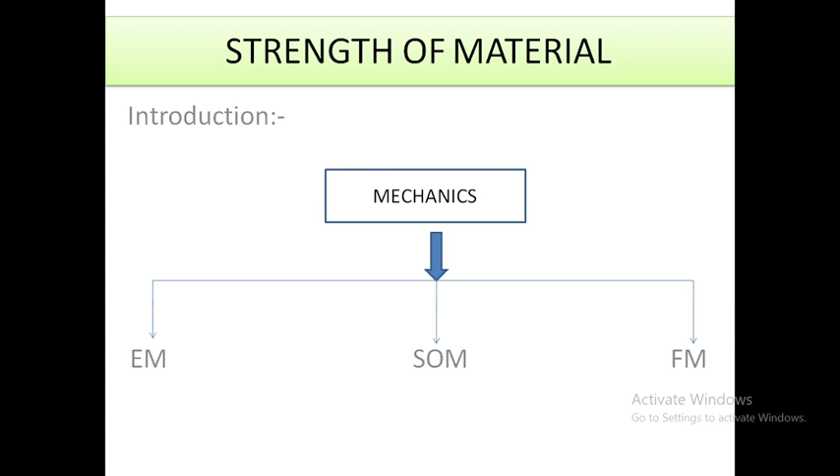Strength of material is a branch of mechanics. Mechanics is divided into three categories: engineering mechanics, strength of materials, and fluid mechanics. In engineering mechanics, we deal with a rigid body, which is totally a hypothetical study, meaning it does not exist in real life. This is because a rigid body is such a body in which deformation does not take place under the action of any external loads, meaning there is regardless deformation, so such type of material or body does not exist in real life.

Strength of material is a branch of mechanics in which we study about the deformable body, meaning in strength of materials we especially deal with the deformable body. Deformable body is nothing but a body which deforms, meaning a body which changes in its dimensions, either diameter or length, under the action of external load, under the action of mechanical force. Mechanical force is nothing but the load.

Similarly, fluid mechanics is also a vast or immense subject in civil engineering. In fluid mechanics, we deal with deformation continuously. Once the external load is removed, it also deforms continuously. So this is the introduction of strength of materials.

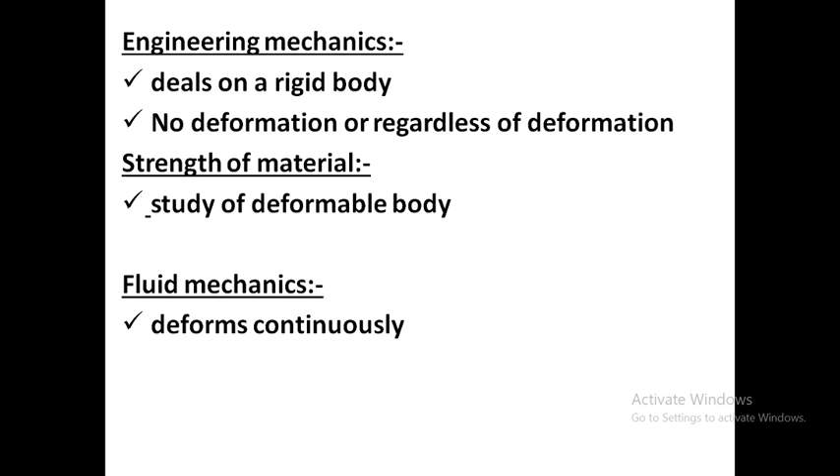So what will we study especially in this series of lectures? Dear students, I will make sure that you understand the concepts of strength of material well at the end of the lectures. I will connect what we are studying in the theoretical part to the practical level. Once you know the practical meaning of anything, especially in civil engineering, it will provide a well and lucid knowledge in a particular subject.

In unit 1 we are going to deal with simple stress and strain. Stress, I will tell you in short: stress is nothing but the internal resisting force. It is internal, not external force, it is an internal resisting force. When any body on earth is subjected to external load, there must be an internal resisting force. When you cut the body, there is an internal resisting force which resists the external load. That is nothing but stress.

Strain, if you simply say, is the measurement of deformation, what deformation takes place under the action of external loads, the body must deform. That deformation is nothing but the strain.

Similarly, second we will deal about the types of stress and strains. Elastic constants: in elastic constants we will deal about the modulus of rigidity, bulk modulus, Poisson's ratio, which is very important in the civil engineering field. Similarly, Hooke's law: Hooke's law is nothing but when stress is directly proportional to strain within the elastic limit. Similarly, stress strain diagram, which is very important from the civil engineering point of view. In the stress strain diagram, I will explain each and every part of how the diagram formation takes place.

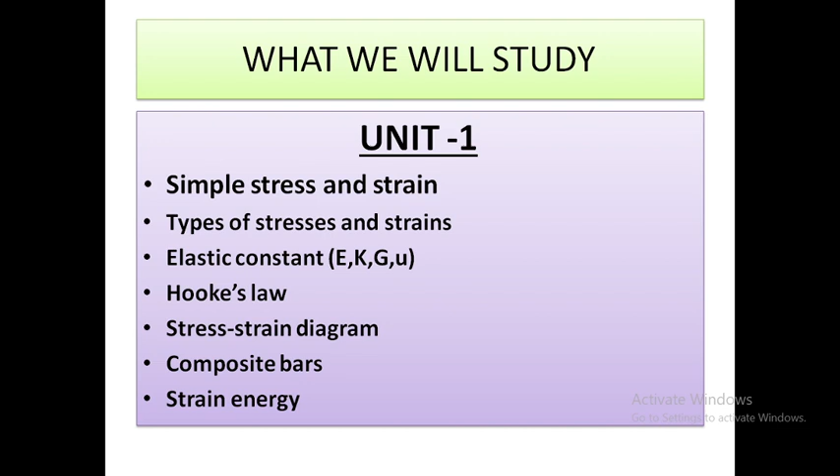In unit 2 we will deal with complex stress and strain. In this, we will deal with principal stress and strain, which is a very important part of strength of materials. Once I start the lectures, I will explain in a fast way and make sure you understand clearly.

Principal plane is where the shear stress is zero, especially dealing with oblique sections. Similarly, principal plane, axial, biaxial and triaxial loading take place in a plane. Axial is loading in one plane. If loading takes place in two mutually perpendicular directions, that is biaxial. Similarly, triaxial is loading in three directions.

Connecting this to practical levels, consider gas cylinders or balloons. Once you fill gas in it, it exerts pressure in all directions — that is triaxial. Similarly, stress is a tensor quantity, and we will deal with how it is a tensor quantity; this is very important and also increases IQ levels. Similarly, we will deal with the Mohr circle.

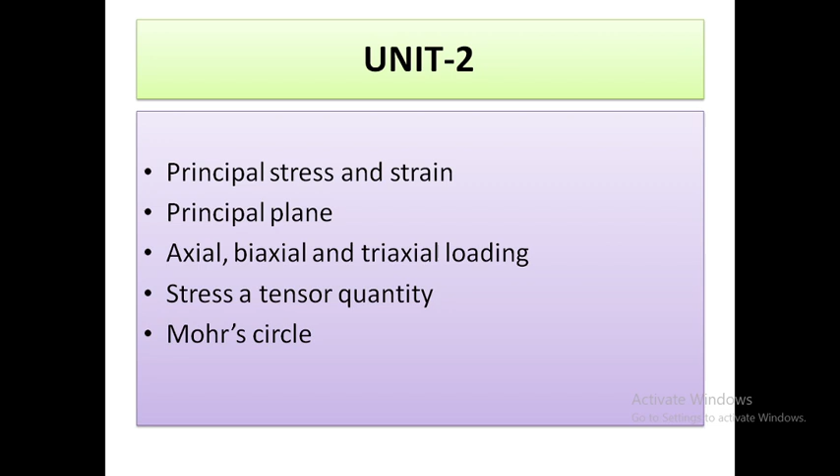Now in unit 3, it contains important parts of civil engineering: beams, horizontal structures. Beams are known to everyone, very familiar in real life. How shear force and bending moments take place in beams, what is the maximum bending moment, and some problems on it. Point of contraflexure — we will draw shear force diagrams and bending moment diagrams in unit 3. These are the contents of unit 3.

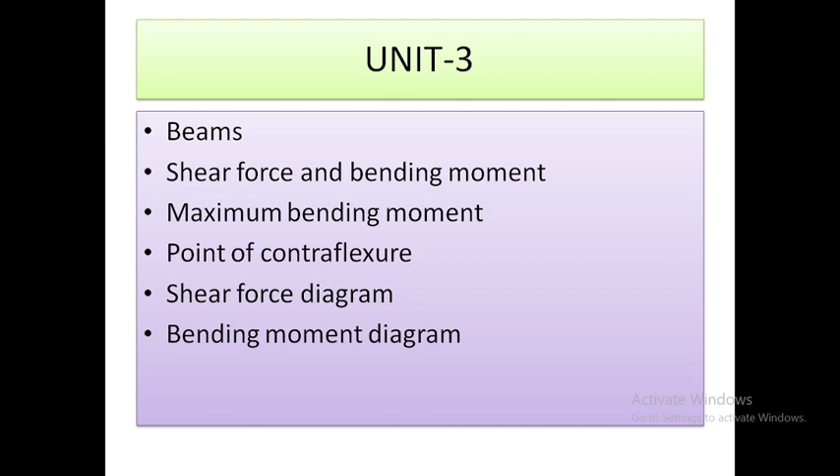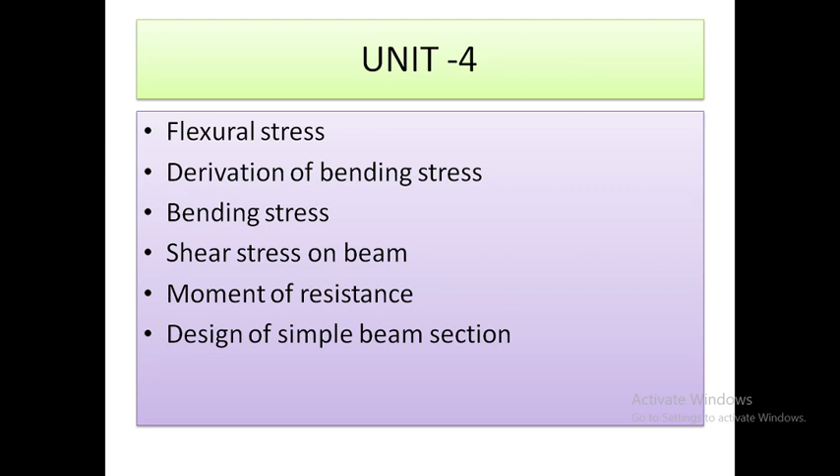Similarly, in unit 4 we will deal with flexural stress. We will derive the bending equations — derivation of bending equations, bending stress, stress on a beam, shear stress on the beam, and moment of resistance. We will deal with the design of simple beam sections, and design some beams to determine which is best for structures from a civil engineering point of view, or which may not be. What is the minimum depth or width of the beam — we will know this in this section.

Similarly, unit 5 contains deflection of beams. What is deflection of a beam, we will deal with in this unit. Once I start the lectures, I will explain clearly and you will understand. This also includes slope, deflection and radius of curvature. We will find the differential equation for the elastic line of the beam, the double integration method, and we will discuss Macaulay's method as well.

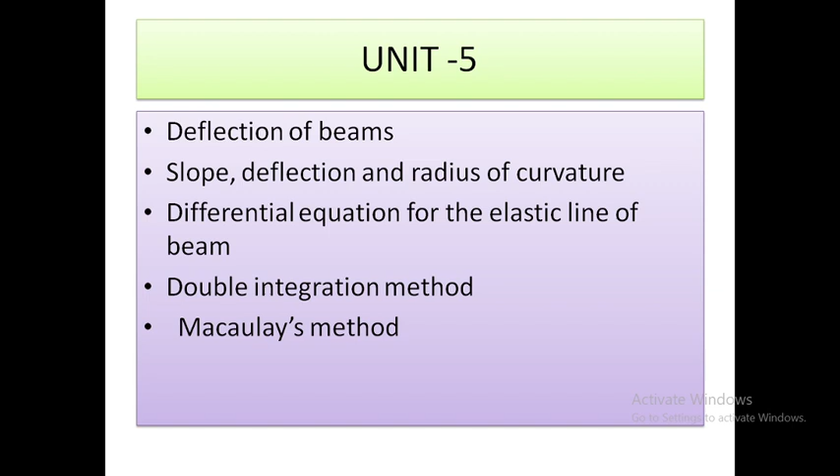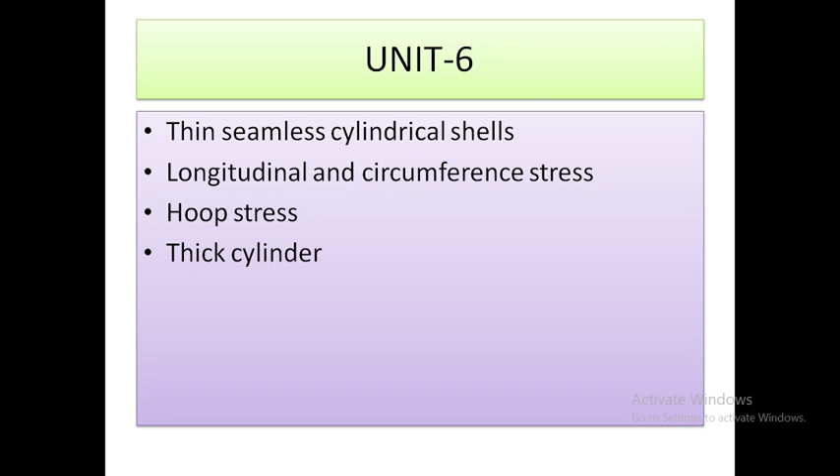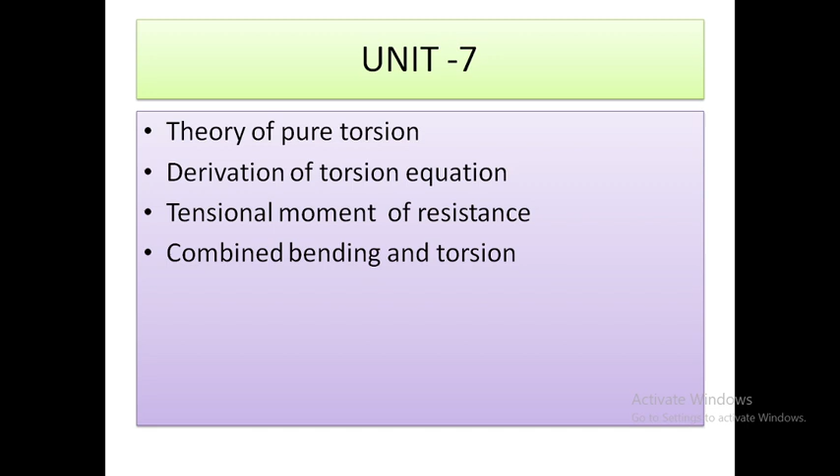Similarly, unit 7 is the theory of pure torsion. It contains an introduction to torsion — what is torsion, theory of pure torsion, assumptions in torsion, and derivation of the torsion equation. We will derive the formula for torsional moment of resistance, and combined bending and torsion. Once we consider torsion, it only comes to mind that the shaft is subjected to torsion, but in actual practice, when a shaft is subjected to torsion, there is also a bending moment and bending stress taking place. So once we start the lectures, we will deal with combined bending and torsion.

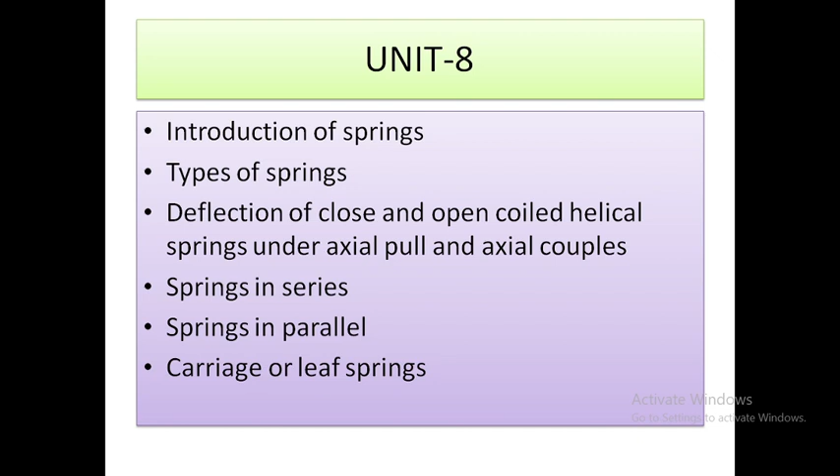Similarly, unit 8 contains introduction to springs — types of springs, deflection of closed and open coiled helical springs under axial pull or axial couples, springs in series, springs in parallel, and carriage or leaf springs. This unit contains the introduction to springs.

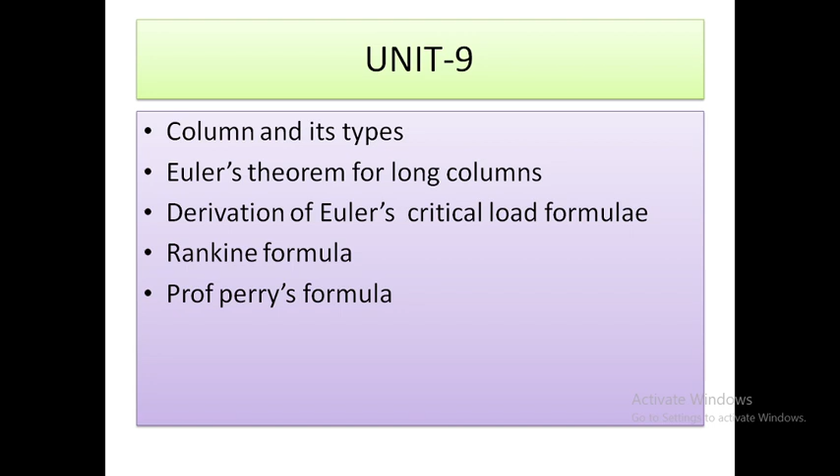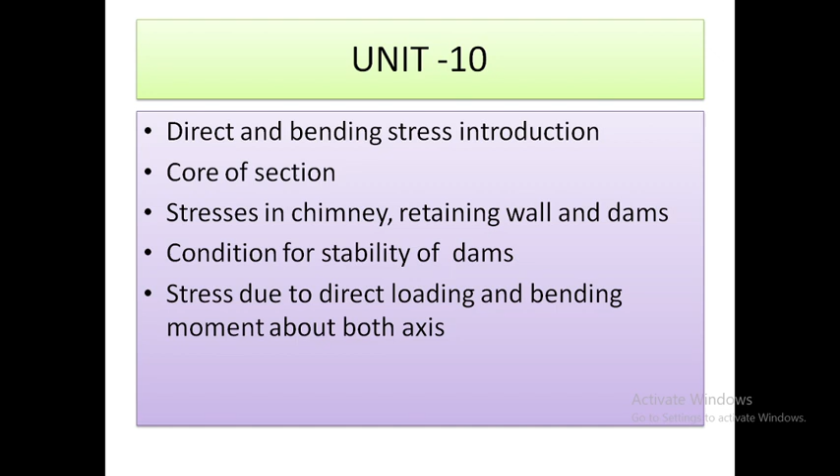This unit is going to be very interesting as it connects really to the practical level. So stress due to direct loading and bending moment about both axes, the x axis and y axis — what are the stresses developed due to direct stress and bending stress. So in unit 10 we will deal about all those things.